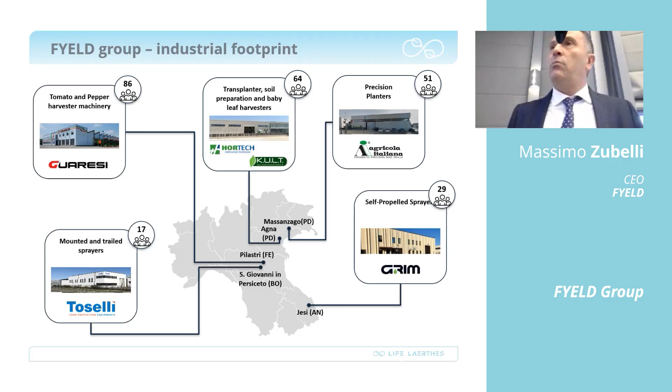These are the 5 plants we have in Italy. We have 2 plants in the northeast, in Padova, which is Hortech, KULT, and Agricola Italiana. We have 2 plants in the center-north of Italy, close to Bologna, Toselli, and close to Ferrara, Pilastri, where historically the manufacturing plant of Guaresi is located. And in the center of Italy is where we have our boom sprayers company.

This is the vision of the group. We started in '22 with this picture. If you look at it, you see that from soil preparation through crop care, seeding and transplanting, up to harvesting, the vision is to cover the full agronomic cycle for vegetables and horticultural applications.

So today, with KULT and Hortech, we are into the soil preparation area. With Grim, Toselli, and KULT, we are into traditional and non-traditional crop care systems. We have seeding, precision planters and transplanters, so we cover this area too. We also cover crop care afterward, and with Guaresi — pepper, tomato, and baby leaf harvesters — we cover the harvesting equipment as well.

This is the starting point. We continue to invest, so our aim, with an open-minded approach, is to cover much more of this agronomic cycle, including some additional parts.

In the future, the shareholder gave us the task to add additional companies. So there is a mid-term strategy to have an even bigger group, creating the critical mass of investment and profit for engineering and other kinds of investments, which will be our next challenge. Just to get into LIFE LAERTHES, I wanted to sum up all of these companies.

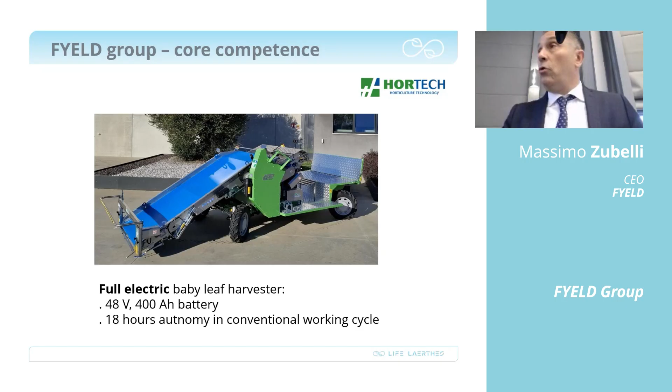Consider that today, out of our production of harvesters at Hortech, 30% are already full electric. So we already have competence in some components, driving systems, and software control of this kind of technology for this application, of course.

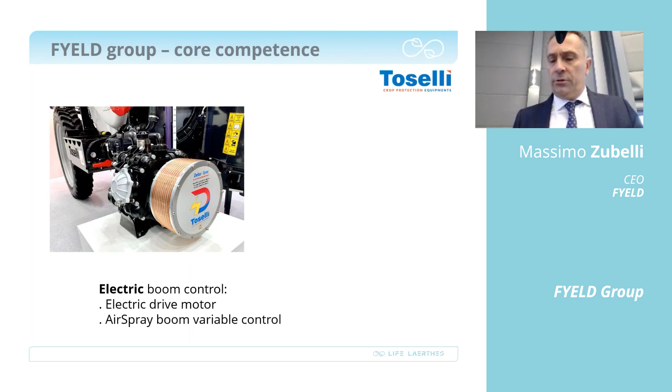Then Toselli, some years ago, won an innovation award at EIMA for presenting a solution, not yet in production, to make an electrical control of the boom — another competence we have on the table and will likely develop in the near future, because here at Agritechnica we see many component and product manufacturers presenting hydraulic and electrical solutions. So for sure, soon we will adopt these systems on our machines.

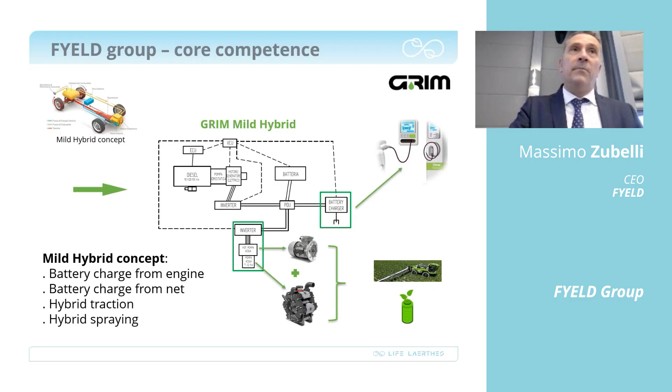Grim, at the last EIMA exhibition, presented a hybrid concept of the machine. Again, not in production, but we gained experience with the technology. This is, again, part of our core competence.

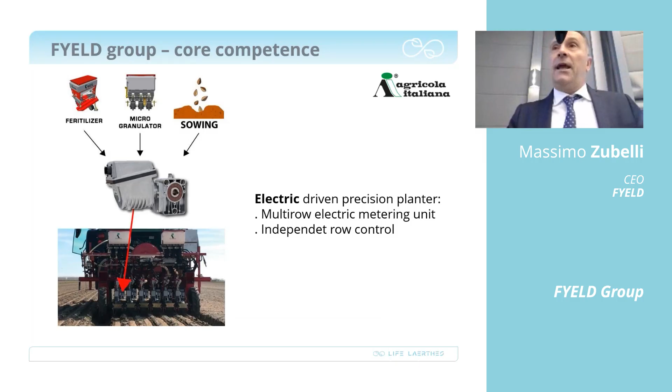In Agricola Italiana, we have a big production of electrical machines. Many of the precision planters today, if you look here at Agritechnica, are driven by electrical motors. This is, again, a competence we have in components and controlling systems.

We adopted AI systems which control the robot to remove weeds from the field. So we have the core competence of AI and electrical controls of these systems.

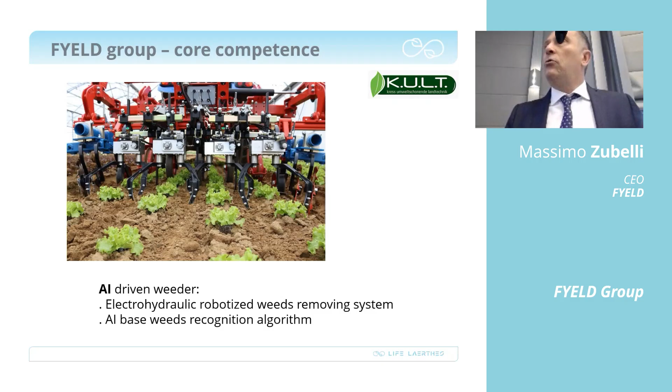And with Guaresi, last season, we entered — because of the LIFE LAERTHES introduction this year — we already tested in the field a field opener machine, full electric, which was part of our season.

It is in this moment a test bench for several components, to add competence to our engineers, not only in production and purchasing processes, but to be prepared when the company or the components move from hydraulic to electric. This is our competence when it comes to a wide approach to electrical matters.

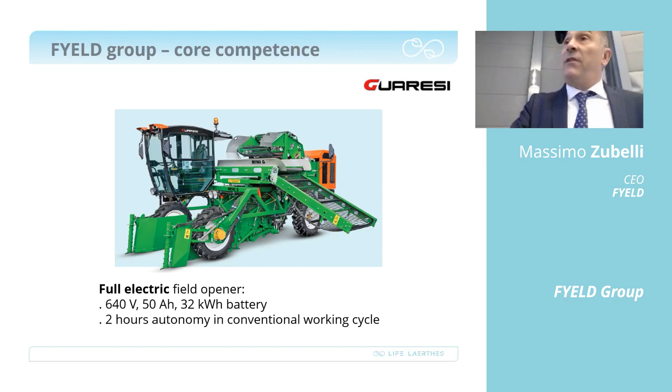So what is LIFE LAERTHES? LIFE LAERTHES is a European program we presented in 2024. Europe, using this name, is promoting innovation a lot.

These days, it seems we have to go back 30 years to carbon, fossil, and those technologies. But we strongly believe the engineering development path of the next 20 years will be in this direction. Even today, speaking about electric and green technology, some people smile, but we strongly believe there will be a big change, and we want to be prepared.

Even though we are a small company, we think we are in the right direction, and we have the right size to be flexible and not too complicated to enter into this pioneering technology.

LIFE LAERTHES, which we won, is almost a 3 million budget program we presented to the European community. Thanks to all of us, because Europe is all of us, we received back 60% of this big budget to support the engineering. So we are investing in our engineering team and with our partners and suppliers.

LIFE LAERTHES is made up mainly of four participants. Guaresi, the driving company, because of the tomato and pepper harvesters. Ecothea, represented by Mr. Somà here, an engineering company focused particularly on development engineering. Polytechnic of Turin and Conesa. Conesa is number one in Europe in tomato paste production. So we are in this group.

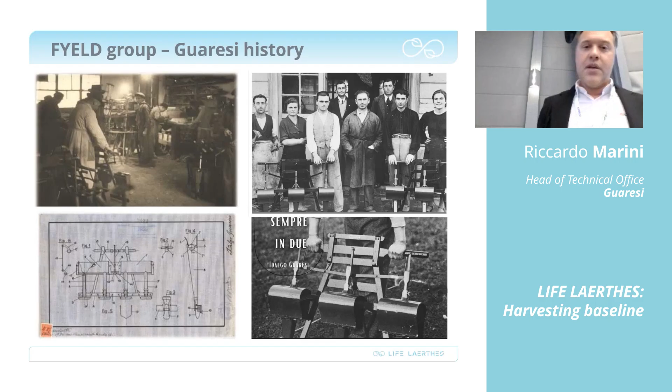First design almost 90 years ago. You can see now some evolution of the machine. This is the oldest one.

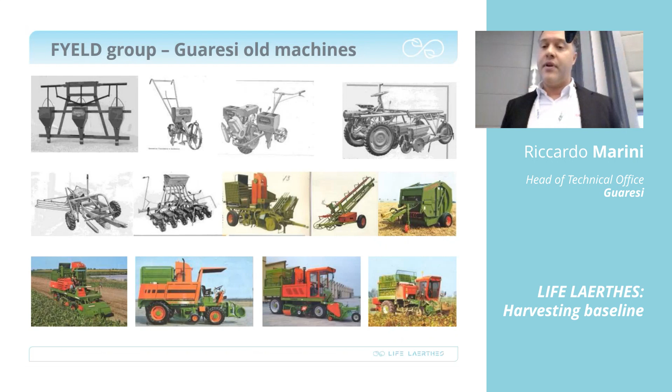At the beginning of the 80s, Italian tomato growers needed a simple and reliable machine to harvest without using hands. So in 1983, Guaresi designed the first pull-type tomato harvester, the model G84. This machine introduced Guaresi for the first time in the tomato world. The natural evolution of this machine was the G85, the first self-propelled Guaresi tomato harvester.

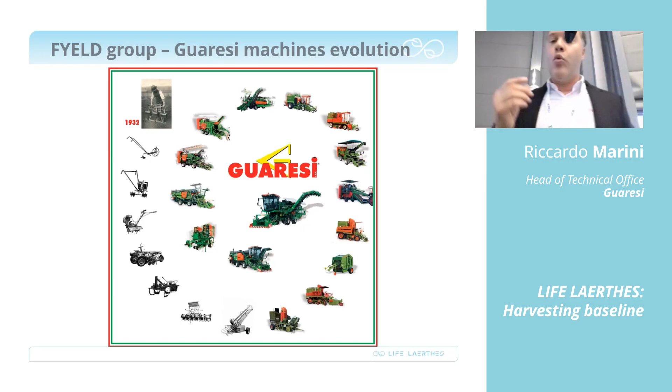Here you can see the evolution over these 90 years. At the center is the standard harvesting machine that we sell in this historical moment. In those years, the interaction between the technician and the farmer was essential to understand which points of the machine needed to be improved.

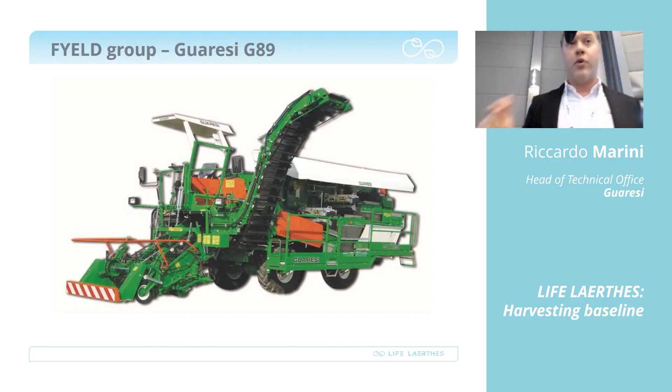At the end of the 80s, this experience allowed the technical department of Guaresi to design the first modern and innovative self-propelled tomato harvester, named G89, shown in the photo. It's quite similar to the standard one, but smaller than the Super G. This was the first machine equipped with an electronic sorter and the first with a vibrating shaker, ensuring for the first time a capacity of over 20 tons per hour of productivity.

The Mini G has two different functions. It allows farmers to open the field, moving the fruit and plants into lateral rows to ensure entry for the big harvester and tractor. It can also reduce the length of every row, which needs to be shortened to optimize the transplant of the tomatoes.

The Super G, which I'll speak about in more detail later, is the natural sequel to the G89, and is produced in two different sizes: 1.2 meter and 1.5 meter width.

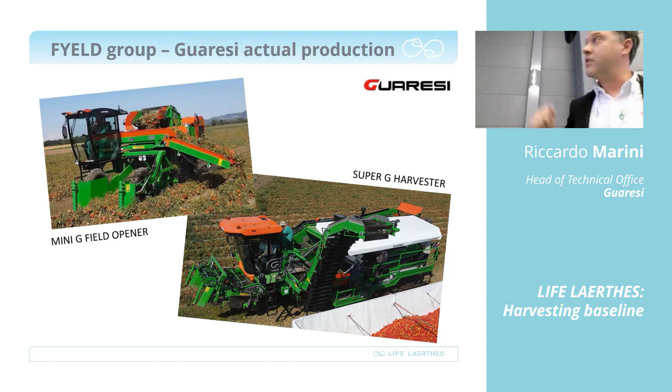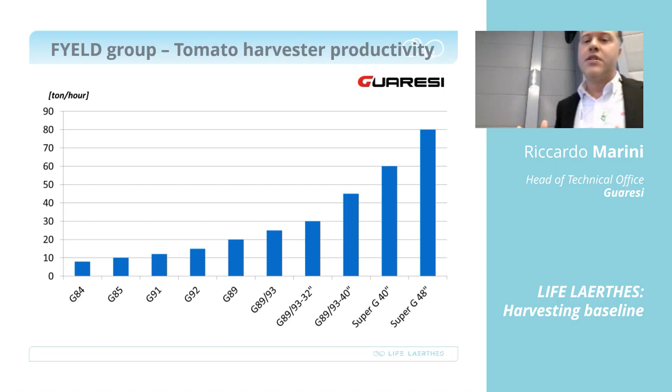Some data that's important to me, to give an idea of the innovation of the tomato harvester over these 40 years: we went from 8 to 80 tons per hour. So in 40 years, the improvement was very, very high.

I'm proud to present the new Super G, model year 24, working in the field.

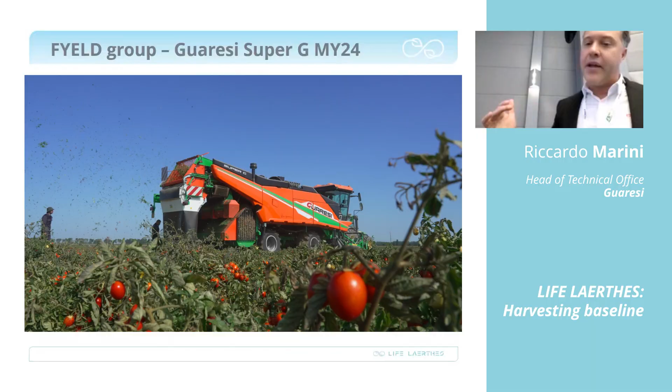The pickup belt is the most strategic system because it's the only part in contact with the ground, obviously, except for the four wheels. Tomato plants are cut at the right height, and we have a pair of finger chassis that ensure the load of the material and avoid the loss of tomatoes, while at the same time ensuring the maximum drain of soil and dirt to the ground.

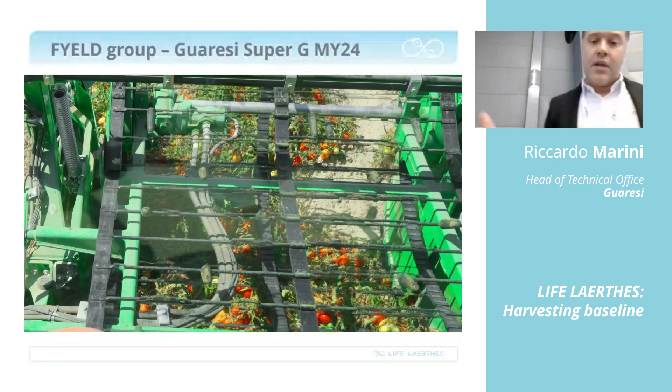When the material reaches the high point of the machine, we have to separate the fruit from the plants. This is done by a shaker that allows the tomatoes to fall into the undershaker belt, while the plants fill the upper vine takeaway belt.

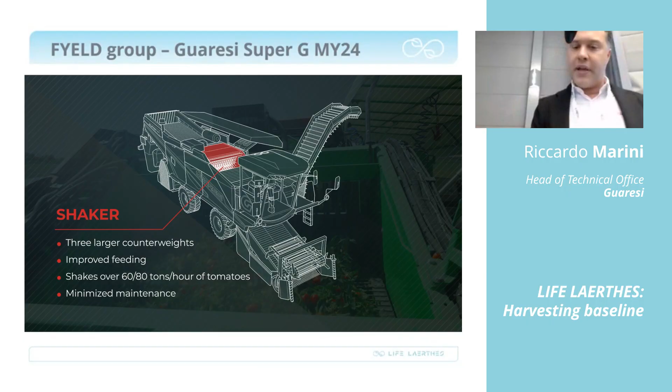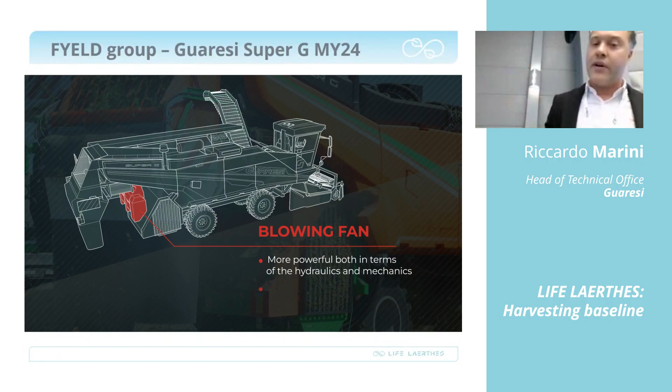At the end of the undershaker belt, we have a blower fan, which is very important to prevent branches and leaves from following the regular flow of the tomatoes, pushing them backward instead.

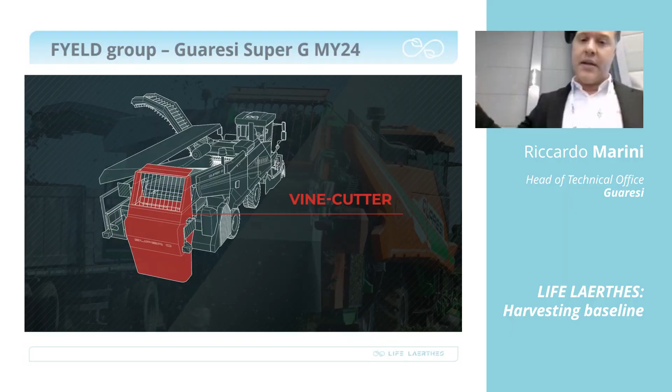On some machines, when the farmer needs to reduce the dimension of the plants, the branches and leaves can be cut by a chopper and put on the ground.

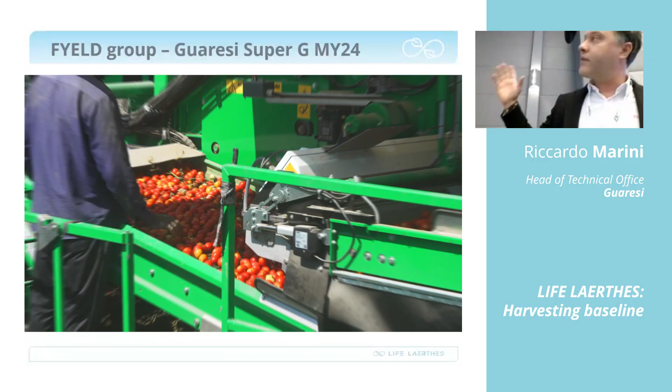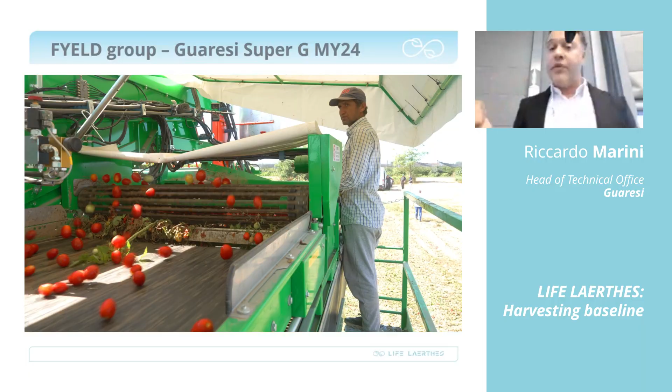Now we have the material separated as well as possible, on the left side of the machine. Here we have a location where people can stand, making adjustments to the speed of the belt and the selection parameters. To ensure maximum operator safety, we selected the correct thin pitch of the belt to avoid accidents to operators' hands.

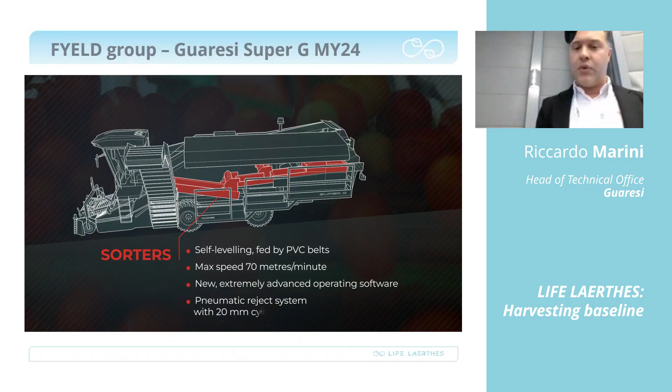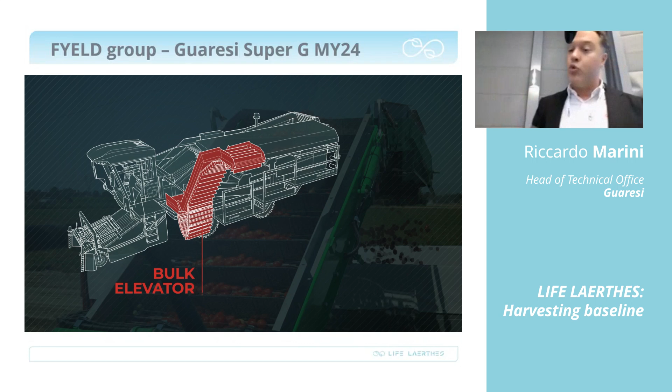Here we have the most strategic part of the machine: the automatic electrical sorter, single or double depending on the configuration. We have up to 48 optic channels that read the product as it flows on the PVC belt, and command a pneumatic expulsion system to pull out non-compliant objects, like green tomatoes, soil, stones, or plants.

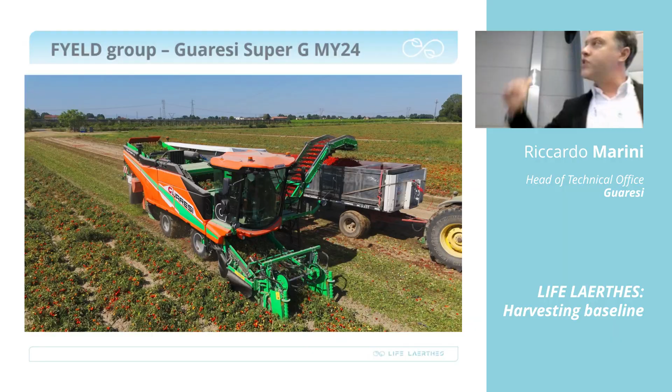The last part regarding the tomato flow is the unloading belt, which you just saw in the video, which can reach different distances and heights for various kinds of storage, such as small bins or the biggest truck beds.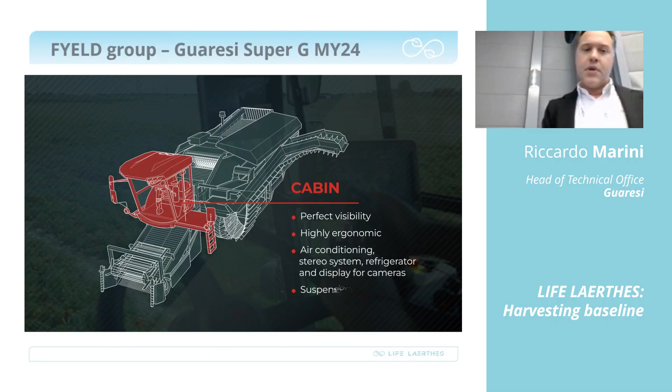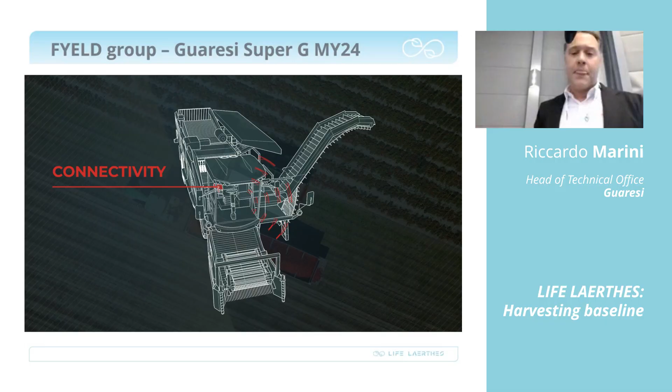Okay, here's the cabin, completely new. We changed many things like air conditioning and a new console. More important for me, last but not least, the connectivity is already a standard of the machine.

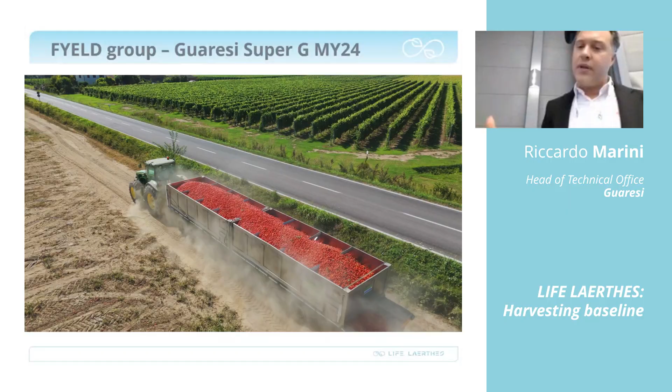Integrated control units allow us to manage remotely the parameters of harvesting, create various kinds of maps thanks to GPS. This kind of interaction creates an ID card of the field, useful for previous and subsequent activities like irrigation, fertilization, and everything else regarding the whole work with other machines.

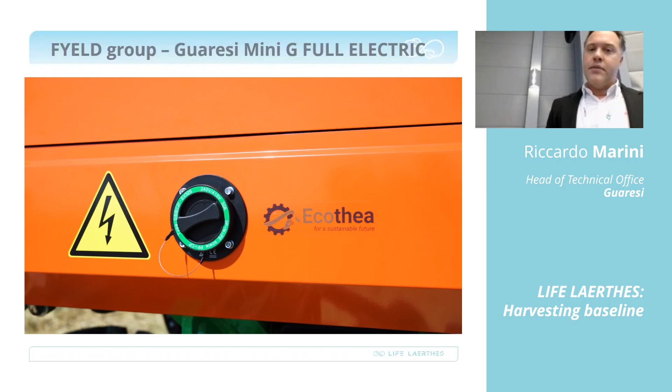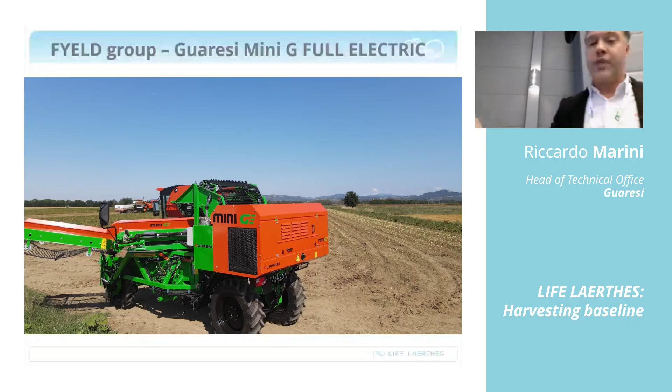Okay, sorry for this long explanation. For me, it's very important to better understand the starting point and the standard layout that will be the baseline of the new project. Like Massimo said before, the first approach of the Guaresi with the electrification world was the Mini G full electric that you see in this video.

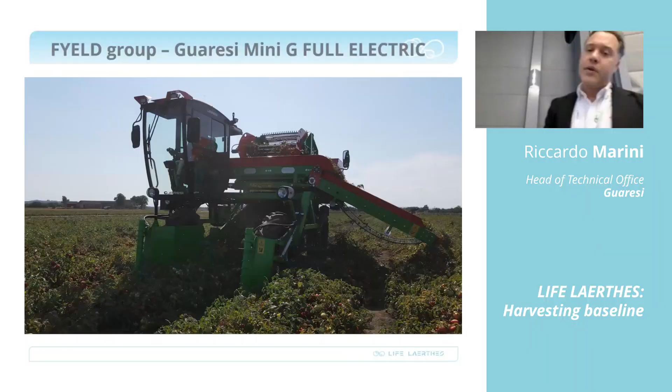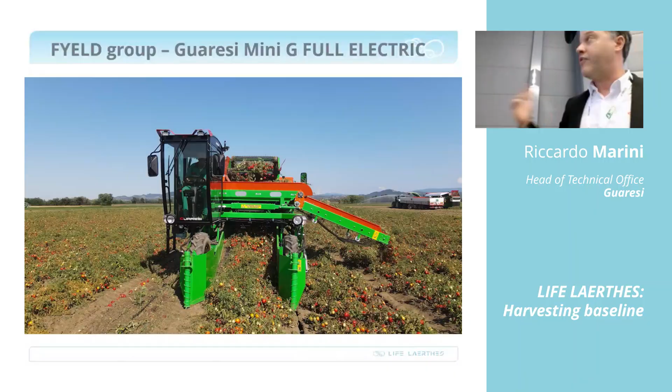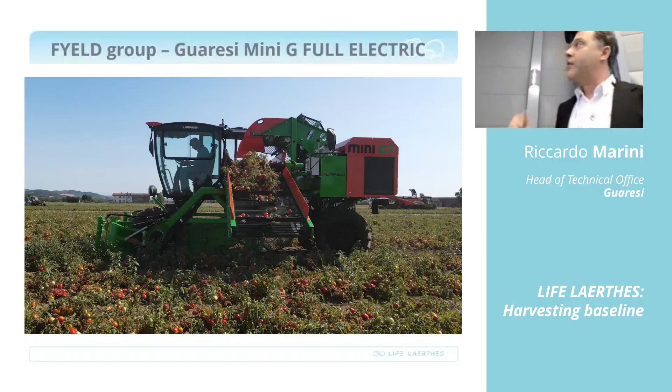For this reason, this prototype, we decided to completely switch the endothermic engine, the power unit, and replace it with an electrical power unit assisted with a battery pack, maintaining all the existing hydraulic line.

Start all the videos. For the Super G, the solution is more complicated, or better, there's not only one way to introduce electrical power on the machine. The machine is more powerful than the Mini G. To reach the perfect compromise for the architecture of the new hybrid machine, which is the focus of this project,

we needed as much data as possible. So for this reason, the Super G has been equipped with several speed and pressure sensors, with the aim of evaluating the power required as the boundary condition of the different fields.

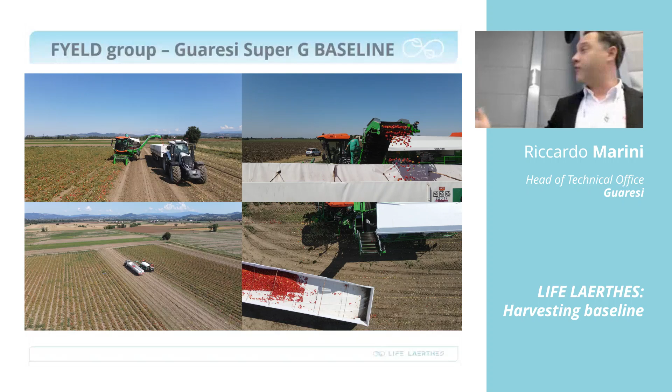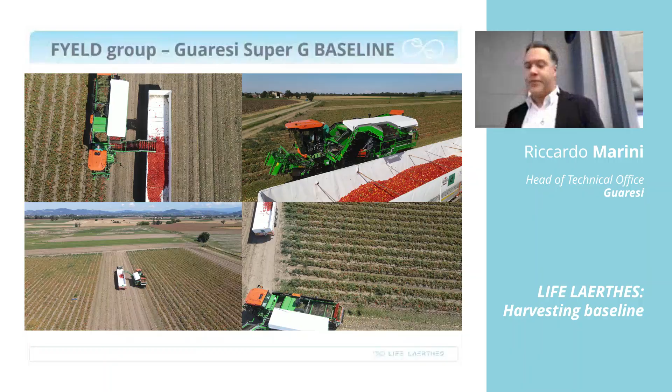At this point, I will leave the next speakers to continue, who will go into the detail, the numbers, on how to satisfy our challenge, which is to improve machine efficiency and reduce CO2 emissions. Thank you for your attention.

Very good. Ladies and gentlemen, good afternoon. My name is Aurelio Somà. I am professor at Polytechnic Torino, and I founded Ecothea. It was a startup. I founded it 7 years ago in Turin, and Ecothea's main activity is to develop electrification of vehicles for agriculture and construction machinery, in the field of ecological transition.

Of course, it is the industrial continuation of a long-term research activity that I started a lot of years ago. For me, it's very important to be here in Hannover, and to see in this room a lot of

Italian technicians and managers, because we are proud to be one of the engineer groups that won the Agritechnica gold medal in 2013 with Merlo, with the electrification of telescopic machine, designed by myself with the well-known Amilcare Merlo, who was a big partner of mine at the beginning of this long journey of electrification.

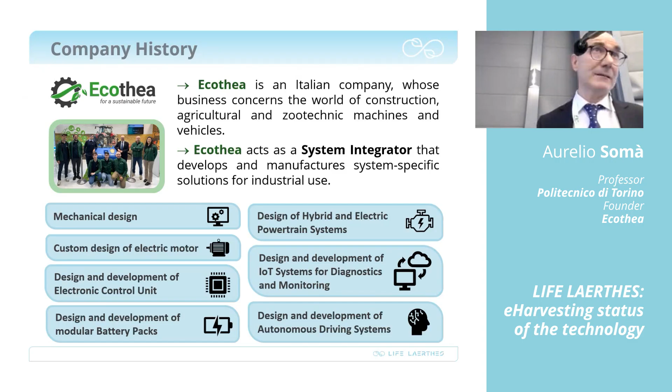Then we develop an innovative patented sensorized battery pack. We have our own battery pack with an international patent, because in this patent we put the idea of realizing state of charge and state of health directly sensorized on the cells.

The main technological challenge we are facing is the transition to electrical, and moreover energy saving, in order to have a real application in Agriculture 5.0 in terms of evaluating energy saving and energy consumption. Our experience, even if short time, is demonstrated in this slide. You can see some pictures of the vehicles we designed.

We participated with the partners present in this slide in our first years. We can start with the feed mixer designed for Supertino, an Italian company that was presented here in a previous edition of Agritechnica, then arrive to the long cooperation that since 6 years we are developing with Antonio Carraro company for designing both the electric and hybrid tractor.

In the case of electric and hybrid, we have numerous innovative patents on powertrain and tractor architecture. In particular, one recent patent of 2022, now extended international, together with Antonio Carraro, gives us an innovative architecture that give us the possibility to realize an industrial line that will have at the end both the hybrid and electric tractor on the same architecture.

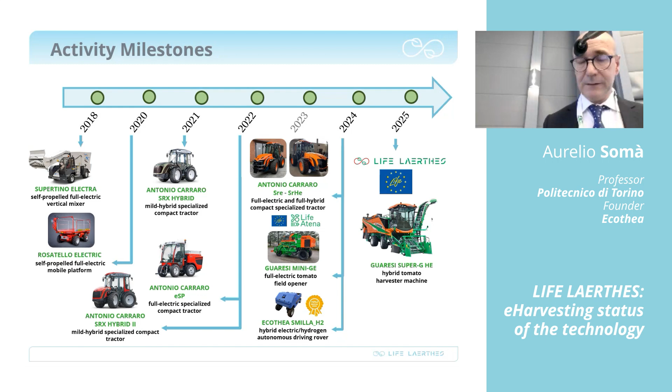I already mentioned the long activity with Antonio Carraro, and it's important to show this slide to introduce this project today, also to give you an idea about the organization of a LIFE European project and some results that here are presented in the video, and I will briefly describe you.

The LIFE ATENA project involved the development of the platform that I briefly introduced you before, of a hybrid and electric tractor specialized for vineyards.

One of the novelties of the project is that in the tractor we have an electric 48 volt plug that gives the possibility to become a first proposal, and we hope that it becomes a standard for the future, to have the possibility to interface the tractor with several, not one, but several implements. In the project, for example, we have a pre-pruner, defoliator, sprayer, and a controlled plow.

The tractor is in the class of a specialized tractor with a maximum installed power of 100 kilowatt. The machine is powered by automotive standard electrical system, some of which were developed directly by Ecothea, and there's a 400 volt power bus. The results have been very impressive during the test in field.

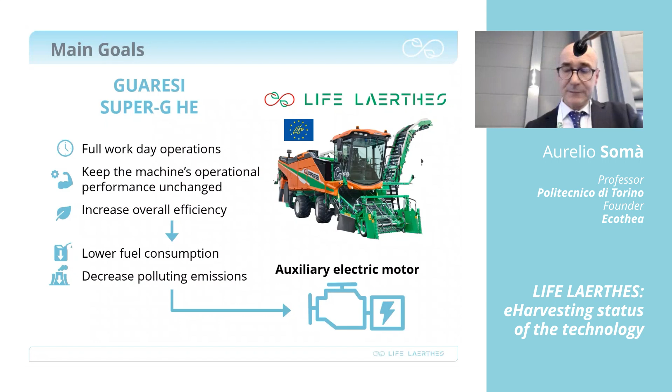In fact, it's very important that if at the end of this presentation we reach from you some curiosity and some questions, we are open to give you some more explanation and answer.

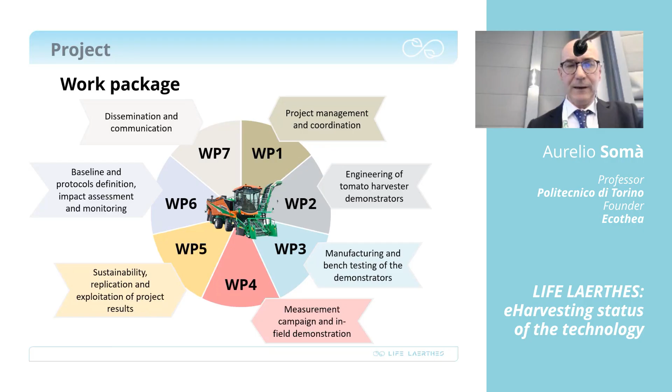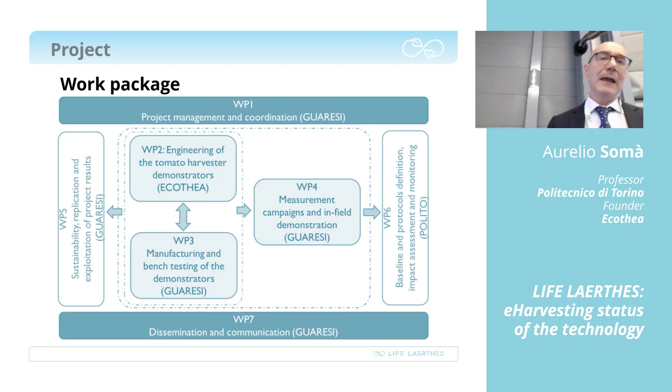The logical and temporal development of the project graphically described in this slide will give you the idea of the interconnection of the partnership. Our experience in engineering of electrification will help Guaresi go deeply in the electrification. But there is a very strong interconnection with the two companies in order to arrive at

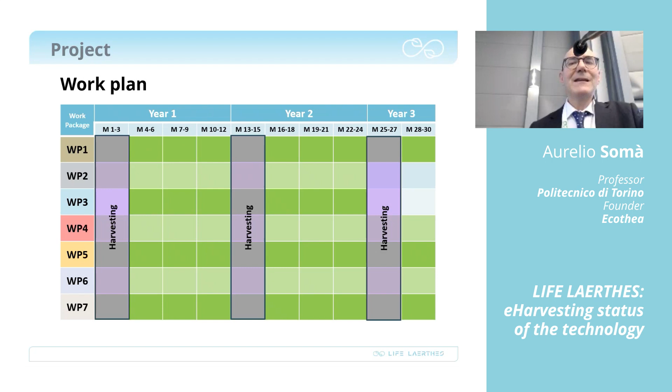the manufacturing and realizing of the prototyping and to arrive at the field test. The timeline graphically shows the idea of the time running in this project of 3 years. It was very important for me to give you some more comments on this slide, because the field testing phase is very, very important during the period when processing tomatoes, because tomatoes we have in summer. So you can see 3 different moments of the harvesting.

We already completed in summer 2025 the baseline with traditional machine. Now we are developing the first prototype, and next summer in Spain with the partner Conesa, we will test it. Then with cherry tomatoes, small tomatoes, we will arrive to demonstrate also in-field testing in 2027 in south of Italy with the derivation of the second hybrid machine and the second prototype.

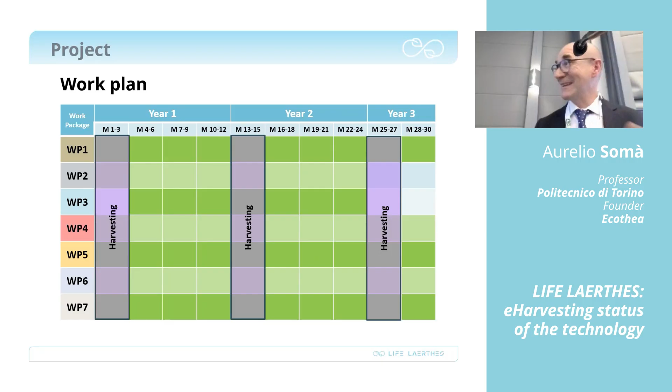This is my presentation, very briefly, of our long activities, and now I finish my presentation, passing the possibility to present to my colleague, Francesco Mocera. Thank you very much.

Good afternoon everyone. I'm Francesco Mocera, professor at Politecnico di Torino of machine design for electric propulsion system. What we'll see in the next slide is a very brief summary of the main key goals of the project from the engineering point of view, and also from the environmental impact point of view, which is quite an important aspect for the LIFE program.

Just to give you a brief idea of the basic structure and architecture of the machine, we will have the important introduction of electricity on board, pairing an electric motor to a downsized diesel engine with two main purposes. One is to produce electricity, and in cases where the mechanical load is too high, this electric machine is also able to help the diesel engine overcome the applied load.

This is possible because we have a buffer, the high voltage battery pack that will be installed on the machine. This buffer will also give us the possibility to use another level of voltage on board, the black box of 48 volts, because we want to keep high voltage in the smallest part and area possible of the machine in order to maintain the correct level of safety, and move as much as possible of the auxiliaries to 48 volts.

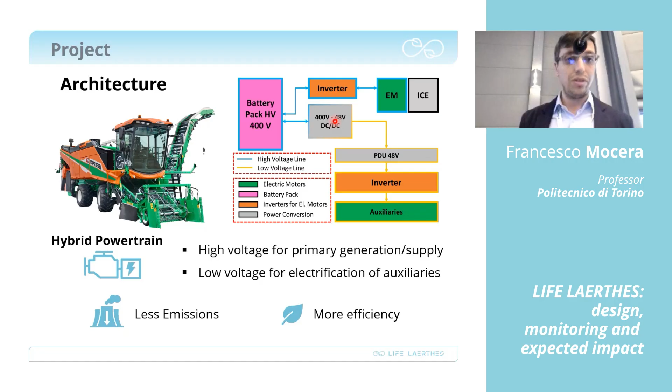This will give us an important achievement: the possibility to reduce the losses due to oil transportation, and also improve the control of the actuators. Although the timeline is quite strict, this is a process that needs a little bit of graduality in terms of electrification. This is the reason why we divided the project into three main steps.

The first one is the monitoring of the baseline to obtain the current consumption of the machine in each subsystem. Then, based on the requirements processed from the baseline, we introduce the first step, the Super G Eco, where we will have the introduction of electric energy, substituting some hydraulic subsystems with electric systems. One important aspect I want to emphasize: we will explore the adoption of biolubricants in order to reduce as much as possible the impact of possible oil losses in the field.

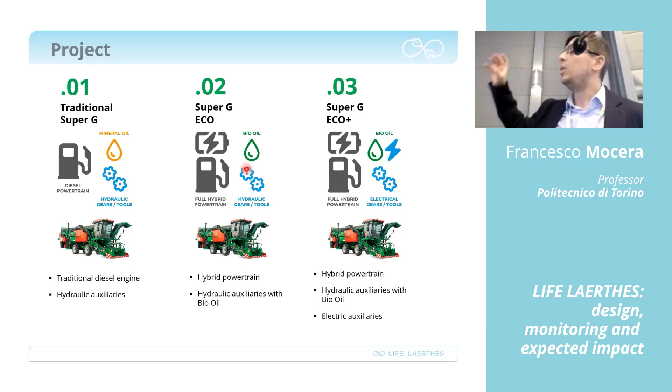Based on the first feedback we will have in 2026 with the Super G Eco, we will try to optimize as much as possible the architecture and the amount of electrification we introduce, because one important goal of the project is to electrify what is necessary to electrify.

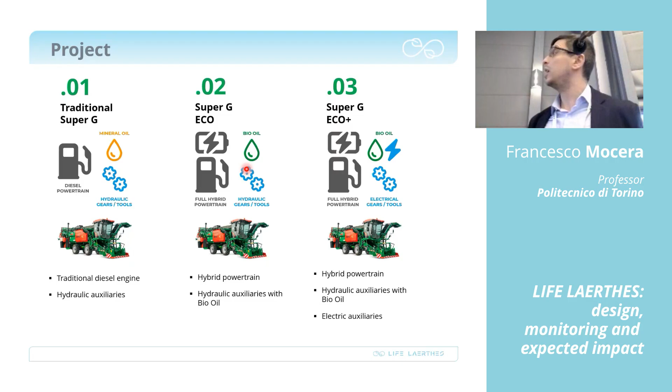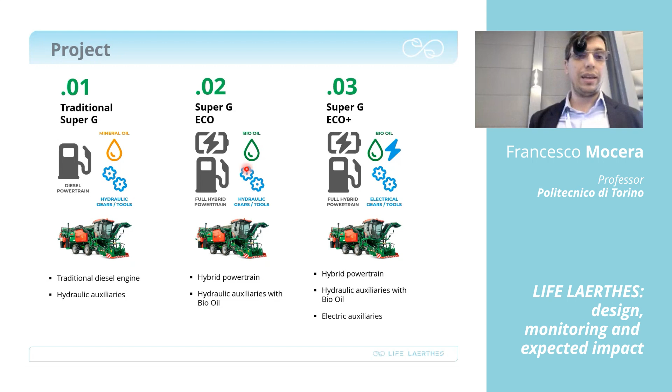With the goal of not exceeding the amount of electric system that we will introduce on the machine, in 2027 we will have the second prototype, the steady state architecture, the Super G Eco Plus, that in principle would have the possibility to achieve the main KPI that we expect. Of course, as I said, this is a long journey, although the timeline is quite strict.

So what we will do as a university is monitor the project together with an external partner, Tinexta, monitoring every important step of the project, from engineering to construction, trying to be as strict as possible on the timeline, because the tomatoes will not wait for us to complete the machine.

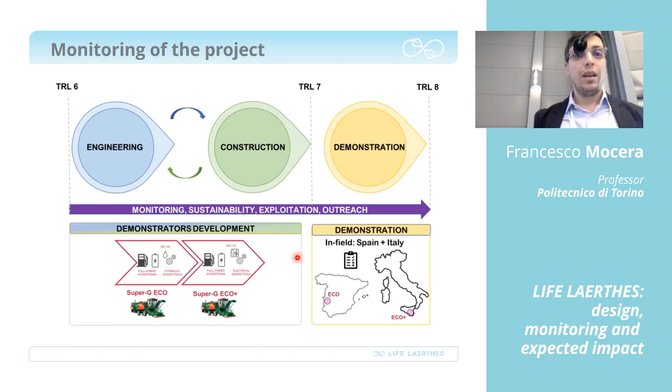As my colleague already said, we have some difficulties from a geographical point of view, because we will need to move these prototypes to different areas. This year, we monitored the machine in Piedmont and one in Emilia-Romagna. The machine monitored in 2026 will be the Super G Eco in Extremadura, Spain, and the last one will work in Sicily in 2027. Since the machines are quite big, this will involve some logistic activities.

What we expect from this project is, with the gradual introduction and optimization of the electric system, to achieve a fuel saving during the whole season of 24%, with a related 7 tons of CO2 emission reduction.

But as I expressed before, one important result, if properly optimized, will be the adoption of biolubricant, because these machines have quite a big reservoir of oil. So the lower the amount of oil we lose in the field, and the more bio it is, the better. Moreover, one important aspect not shown in this slide is that when we introduce electricity on board, we will also reduce the amount of oil required for the machine, because we will eliminate some hydraulic lines. So this is something we will explore, the adoption of biolubricant, but in general the adoption of electricity will allow us to reduce the amount of oil on the machine.

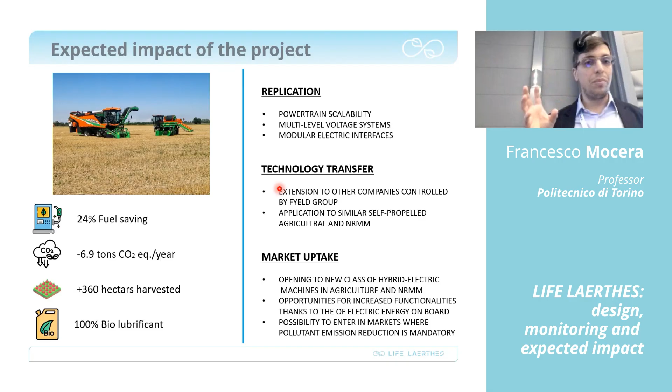The architecture we are developing with all the partners has a key goal in mind: to be as scalable as possible, in order to be replicated on other similar self-propelled machines with a high level of hydraulic systems. In the same FYELD group, we have some examples of that, so this will amplify the impact of the prototypes and of the concepts.

And one thing that is not always considered enough is that when we introduce electricity, apart from the increase in efficiency, we also give the opportunity to improve the work side of the machine, to improve the processing of tomato harvesting in all aspects, thanks to the fine control we can achieve with the electric system.

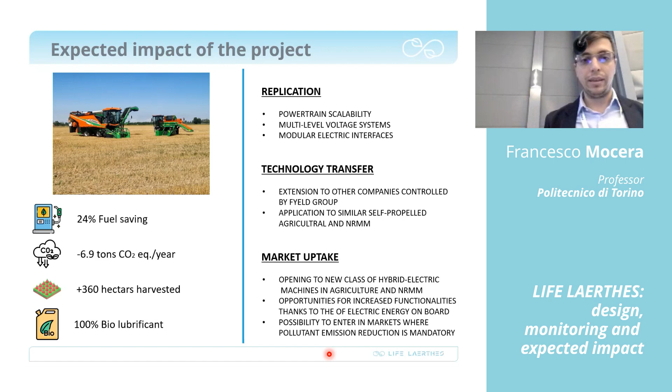I want to leave you with this last slide, because essentially, as Professor Somà already mentioned, we are demonstrating, or we can say the whole fair is demonstrating, that electricity and electrification can have an impact on the agricultural sector. With LIFE ATENA, we demonstrated a concrete impact in terms of fuel consumption reduction, so it is possible to improve emissions and consumption in agricultural activities.

But as you can see in the last portion of the slide, we still have some work to do, not only as the LIFE LAERTHES project, but in general as people involved in this field. There is still a lack of regulations on specific aspects peculiar to the agricultural sector, like the standardization of DC voltage levels and interfaces with electrical implements that can be attached to the main machine. This is something all of us need to work on, to standardize and make the electric system more cost effective.